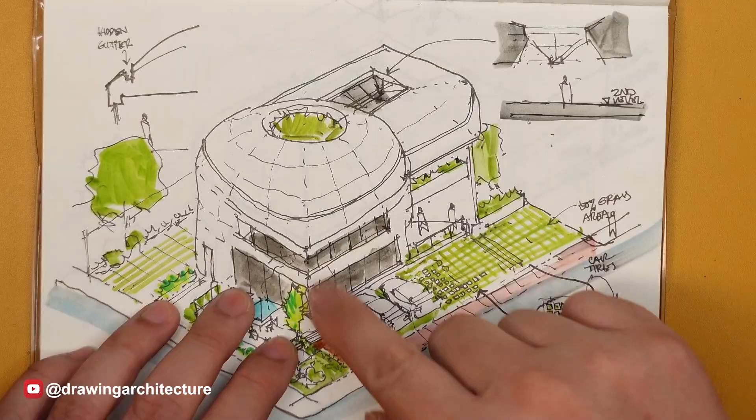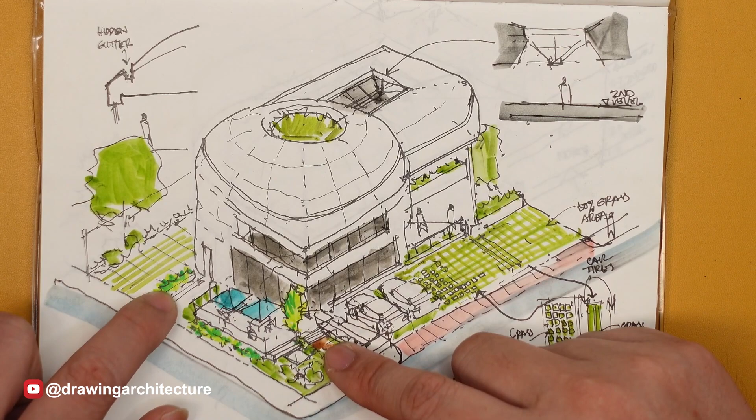As I mentioned before, trees are great at making you relax. More green space means we're more attracted to natural things like trees and plants. It provides good shading. Bushes, for example, would control the flow of people, restricting them at times from certain areas.

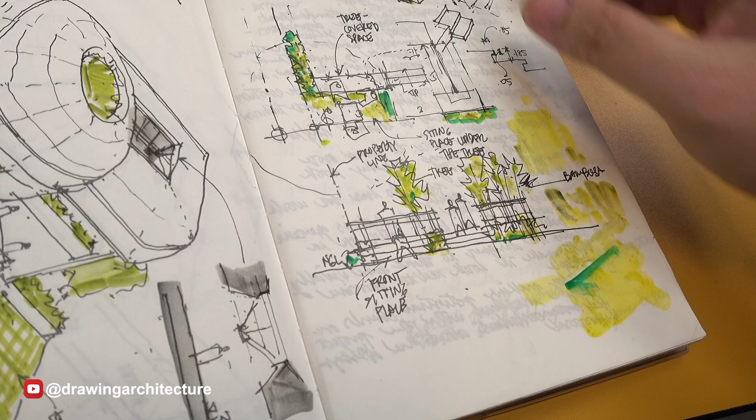So normally that's a natural, much better solution in design rather than having a sort of fence. This is another view of the entrance, the main entrance, and what I was intending to happen, and of course the floor plan. When I'm illustrating trees, I just show sometimes a subtle outline of how big that is, or else this becomes too busy and the focus is not going to be on the design outline of this space.

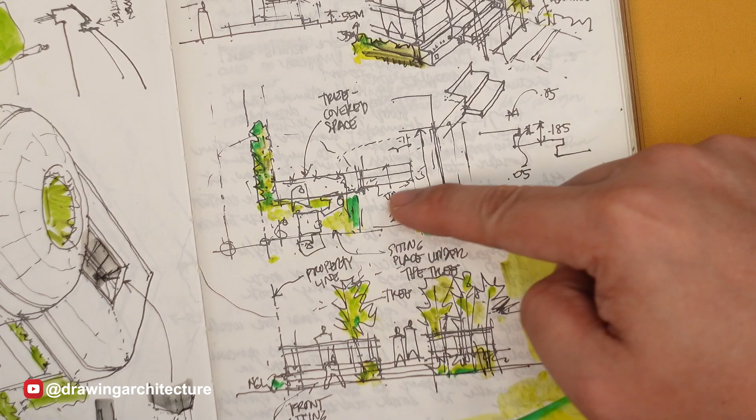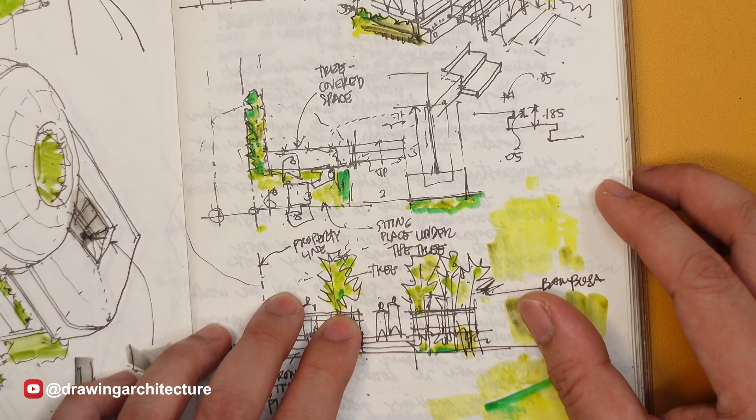So when you're drawing trees or plants, don't draw too much detail on them, or else they become very distracting.

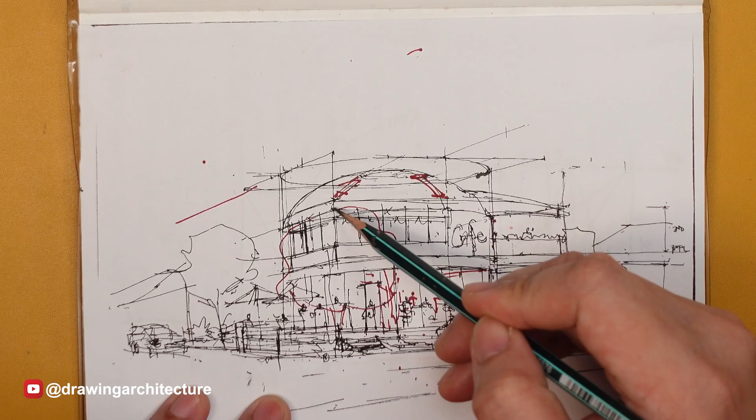I plotted a perspective drawing of this same project. Now you can see the outline of the front tree here in red. It's really this big, so everything that I do here is in scale. For example, this very similar tree would more or less follow the scale of this thing.

Normally I'm placing this at between 6 to 9 meters in height, usually for a medium tree. From the ground to the lower part of this would be something like around 2 meters. So that gives me a 3 to 4 meter diameter of this tree.

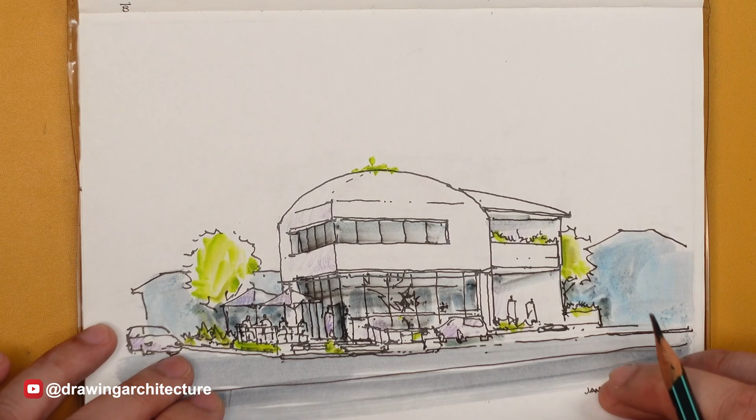So remember to always follow a sort of scale. But in this case, in the final illustration, I did not illustrate the tree at the front because I did not want to distract from the proposed architecture. What you can do when you're trying to draw the tree and still illustrate it properly is do the silhouette - not a solid line, just a silhouette of the tree, but nothing else.

Just to note this - hope you can see this. Something here, very subtle, and it need not be so detailed. Now if I'm going to take some paper and show how this is illustrated, of course I would know where the location of my tree is.

Now it's somewhere there where it's going to grow. I'm going to be putting a bit of the bushes. So based on scaling of this, it's going to be like this. Just place in some dotted lines.

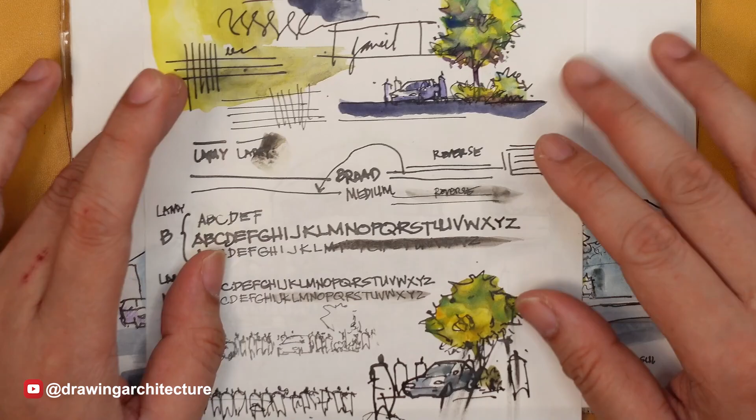So here is an example of a tree silhouette, a tree rendered with some watercolor, but this is more for illustration and practice purposes when I was doing a bunch of practices. Of course, eventually, when you do more of these types of illustrations, the better you become at it.

Yeah, this is just something that I would like to illustrate, just practicing. If you take a look, if I place it into there, this is too much detail, too much drawing attention. This should be lighter than what it is now. Something like this would be just fine.

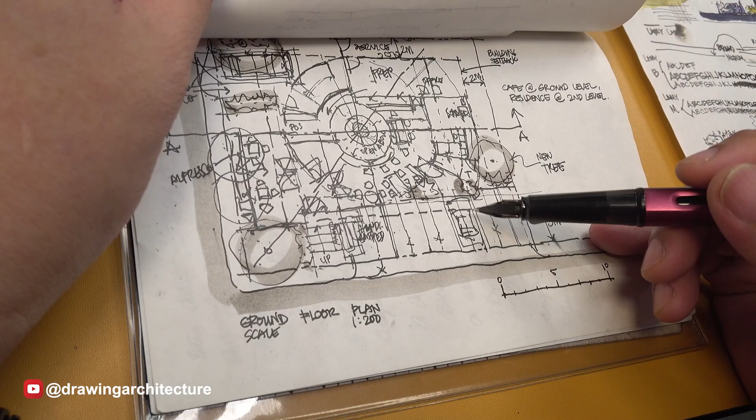Okay, some parts, if you notice, are very boring, and if you can illustrate a tree or bambusa, you can cover up this boring part of the building. It is possible, if you take a look at the floor plan, if there's a possibility there.

So there's a chance for me to create some sort of bambusa-like, or these taller types of trees, so that this boring part or very plain wall of this building can be covered with some trees.

So something like this, you can color that in green because it's an empty space of wall, a surface that is very plain. Then you can do some tall bushes here, so that this space is not so boring.

Usually I place in some people or entourage here, but putting in that element of a tall bush is plausible here, and also this bambusa is plausible too. Yeah, you can do that.

Hopefully this video has helped you understand a bit more how to illustrate plants and trees into your architectural perspective scenes. Hopefully this helps. Thank you very much for watching.